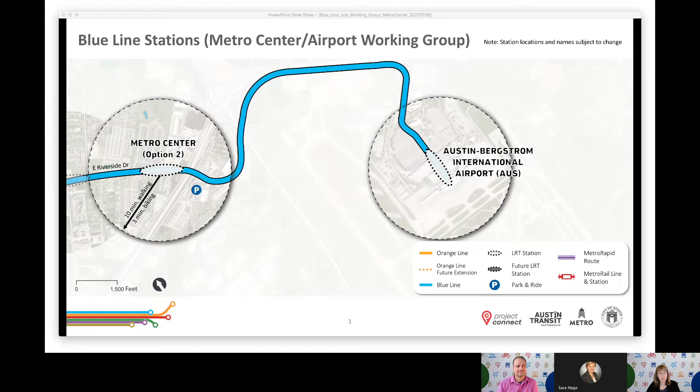In just a moment, Dale is going to walk you through the engineering schematics for the Metro Center Airport section. Schematics are a technical tool used by the engineering team to develop and communicate the design. Dale will zoom into the schematics to provide a detailed look at the transitway alignment and station locations. There is a legend on each page of the schematics, but you won't be able to see the legend while we're zoomed in, so we wanted to briefly orient you. I'll review some important items.

Starting at the top left, in the light green color, indicates an at-grade or street-level guideway. The hatched rectangles are station platforms. The light blue indicates retained cut and fill for the guideway. This color is used to show that the guideway is not at street level, but also not fully elevated. The peach color indicates that the guideway is aerial or elevated above the street level.

The purple shading indicates an underground guideway. We won't see that in this section. Green shading indicates a bike path, while pink indicates a zone for trees and furniture. Gray indicates the paved roadway for vehicle lanes, and yellow indicates sidewalk or shared use paths.

The middle column has a number of different line types indicating different features. For example, the solid red line with notches indicates a retaining wall. The light blue dashed line indicates the proposed light rail transit corridor, and the black dashed line indicates the existing right-of-way limit. Referring to the existing right-of-way is helpful where there might be a need to acquire additional space for transportation facilities or right-of-way through the corridor.

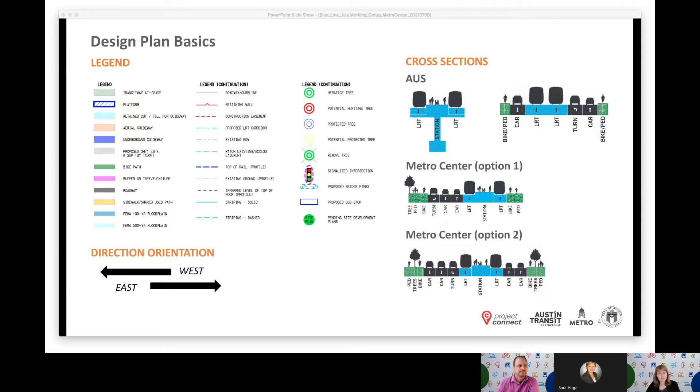Bicycle and pedestrian facilities, as well as tree and furniture zones, are indicated in green. Car and bus lanes are indicated in gray. The light rail lines and stations are indicated in blue. With that, I'll turn it over to Dale to share the engineering design plans.

Great, thank you so much, Diane. Again, I'm Dale. I'm part of the engineering team that's been developing and evaluating the various options we've been considering for the alignment and things like station locations and overall setup for the transitway between Metro Center Station and the airport station.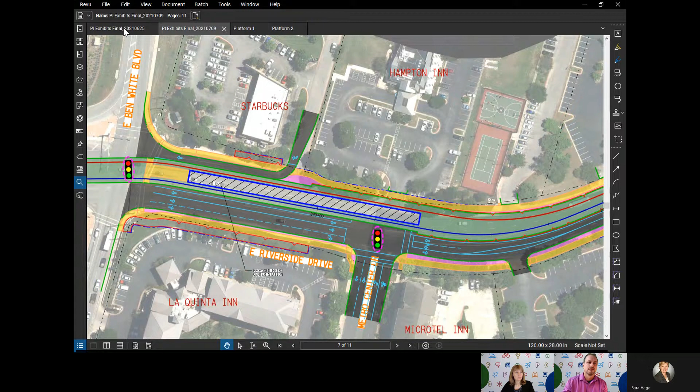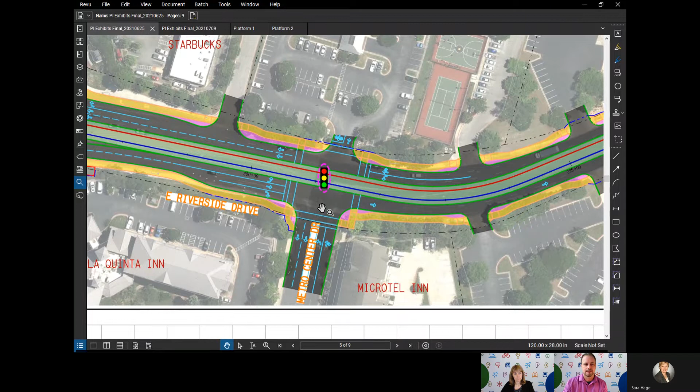Let's flip back over to the option where there's not a station shown in this area, and continue east. In this version, Metro Center would just be a signalized intersection with turning movements allowed from both ways, with through lanes on both sides of the central running transitway.

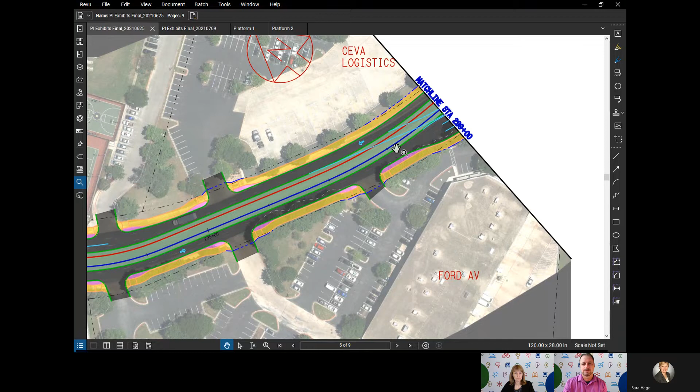Heading further east along Riverside Drive, this version transitions the transitway onto the north side of Riverside at Hoke Lane. You can see where we go from center running on the left, and as we traverse Hoke Lane, we end up on the north side, with all the lanes pushed down onto the south side of the transitway.

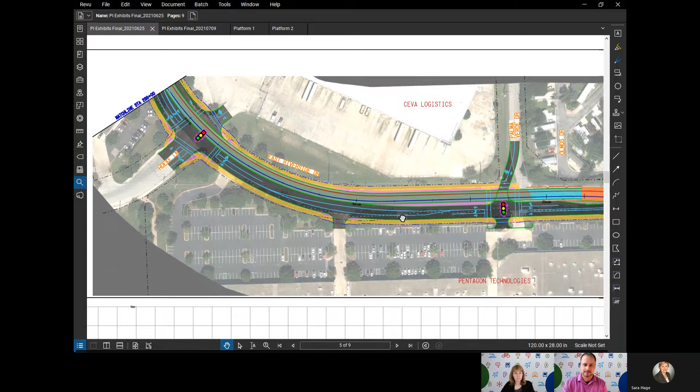Hoke Lane would be a signalized intersection. This is all still being evaluated—we're looking at different options for maintaining the center running here as well. So this is just one version of what that might look like.

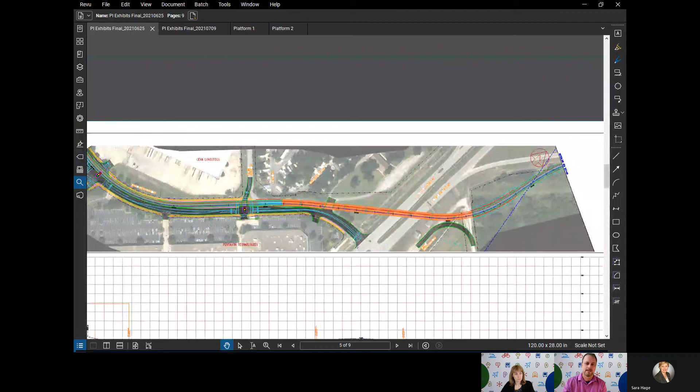As we get over to Palma Verde Drive, let me zoom out a bit so we can get our bearings. Riverside Drive comes through here and more or less dead ends into 183. This is south of 71, which is right up here, so this intersection is just south of 71. This is airport property, and off the screen to the bottom is the end of the west runway, with 71 running left to right up around the top.

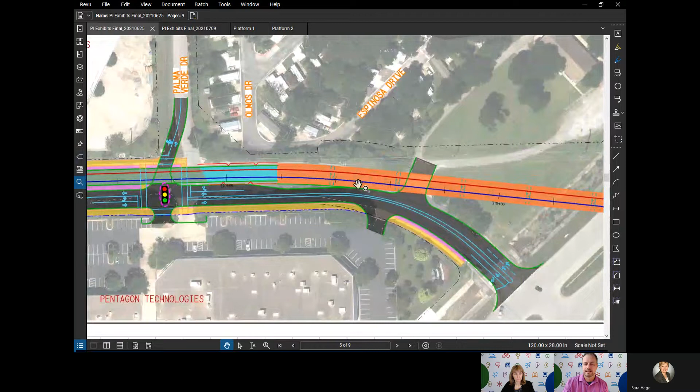As we come down Riverside, we need to get up and over the 183 freeway. The green shading indicates we're at grade at existing ground, and the orange areas mean we're elevated onto a bridge structure. That's the difference between green and orange—green being at grade, orange being elevated on a bridge. You can see what the columns and beams over that bridge might look like, shown by these green dashed lines.

To have enough space to get high enough and maintain access to this property, with the bridge high enough here, we have to relocate the Palma Verde intersection a bit back towards the west. So you see the driveway and the Palma Verde side moved over here to allow us to still be at grade as we cross that.

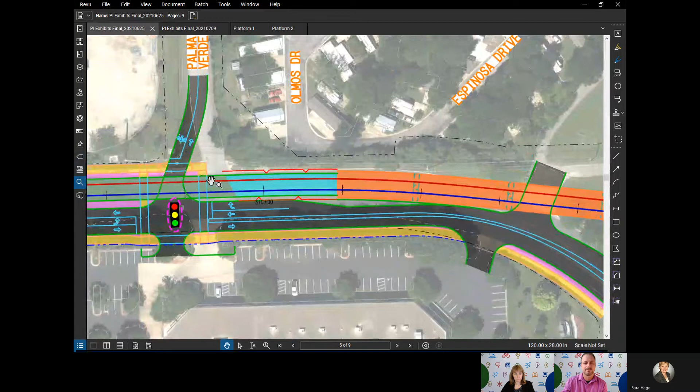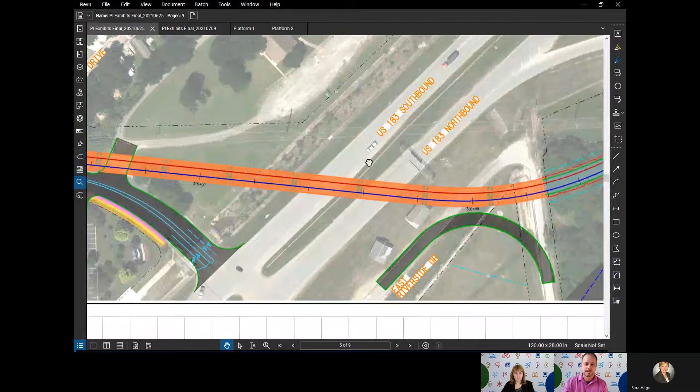We're trying to get up high enough to ensure access to this property, and also high enough to allow for truck traffic and future TxDOT plans as we cross 183. We're coordinating with TxDOT on future 183 plans, which are very preliminary at this point, but we're trying to plan ahead with them.

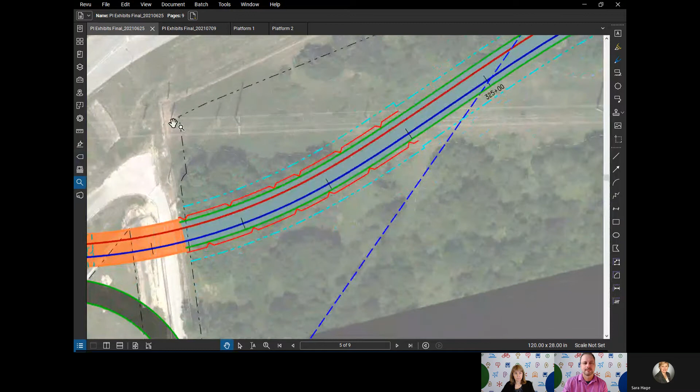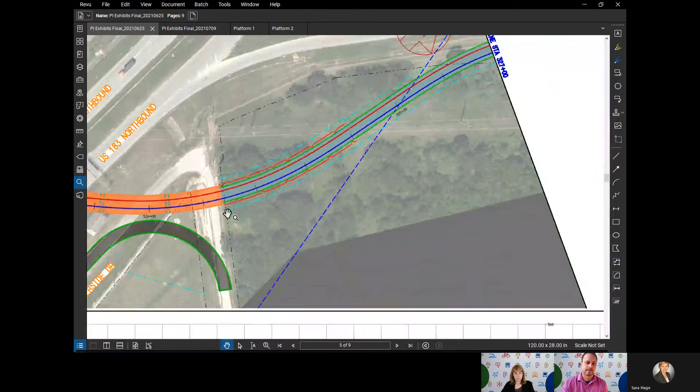Then we get over to the east side of 183, and we're trying to get back down to grade as we cross underneath. You can see in the aerial there are very large Austin Energy transmission lines running through here, and they're very tall. Being off the end of the runway, we need to be down low so we can't go over them, so we're trying to get back down to grade and underneath these Austin Energy lines.

In addition, this blue dashed line indicates protected areas off the end of the runway, where we do not want any structures or retaining walls within that blue runway protection zone. So we're also making sure we get back down in time for that.

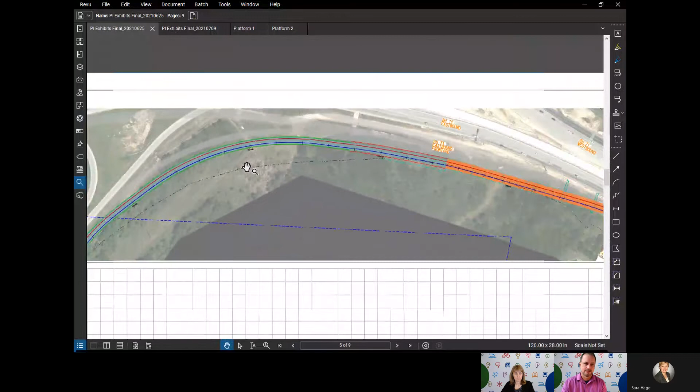Same area—183 is just off to the left. This road is the existing connection between 183 northbound and 71 eastbound. The light hatched gray area shows planned roadways that TxDOT is currently designing—a new frontage road running parallel to the existing main lanes of 71, creating a dedicated exit road for the airport. We've been coordinating closely with them, incorporating their plans with ours, which is largely dictating our alignment. We're following closely along with their proposed alignment as we swing around here.

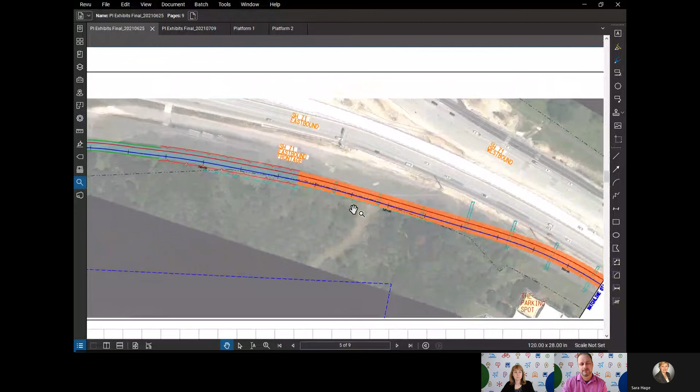As we come around here, we're getting parallel with 71, and we run into a constraint where there are large overhead poles, a parking spot property, and the proposed TxDOT frontage lane. We basically run out of space for our transitway to be in its own area, so we end up decking the transitway on top of the new proposed frontage road for TxDOT.

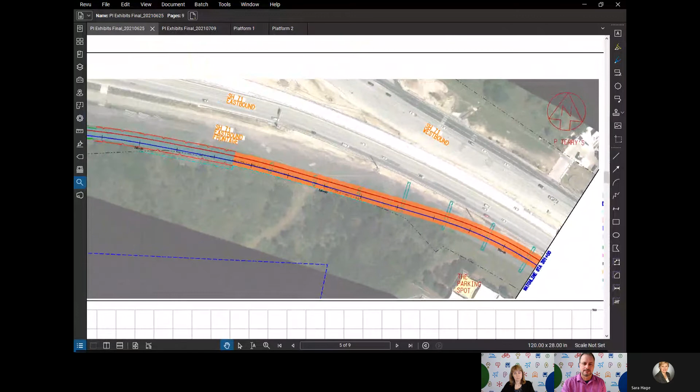So that allows us to just be directly on top of that future road, and you can kind of see how the bridge structure straddles across that future road as we get through here. So again, we have transitioned from being at grade back to elevated, so we're elevated and stacked on top of that road. And then get us back to the next page here.

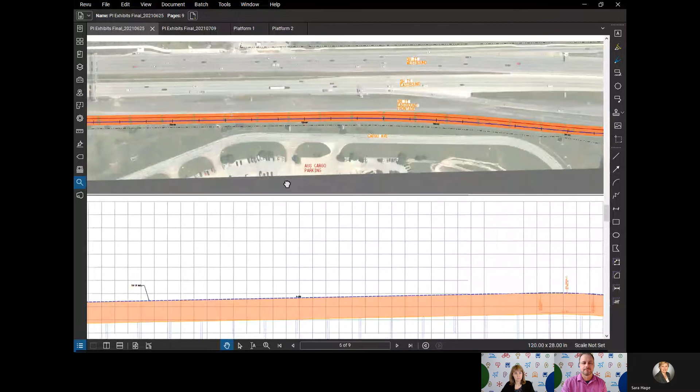Yeah, and so here's the parking spot as we continue through here. So we're decked on top of the future TxDOT frontage road. And then we get past the parking spot, past this Austin Energy substation, and then we swing out. So we aren't on top of the future road any longer. We're running parallel and right next to it, still within TxDOT right-of-way. This is the parking lot for the cargo facility at the airport.

So we continue to head to the east here. So here is Spirit of Texas Drive, which is the cargo exit. When you see that exit on the signs on 71, that's what Spirit of Texas is. We'll be elevated and we will cross over Spirit of Texas Drive, and then we hang a right and head basically directly south in towards the terminal.

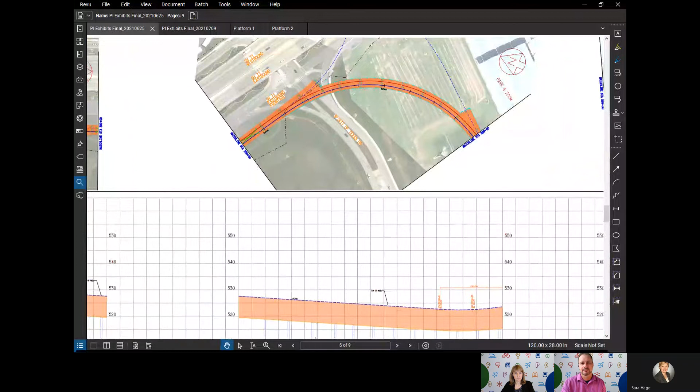We go ahead and remain elevated all through here to help avoid any conflicts with current and future airport plans and their expansion of their different facilities, and make sure we don't impact their roadway interconnectivity through here. So we stay elevated as we come through here. We cross over Hotel Drive.

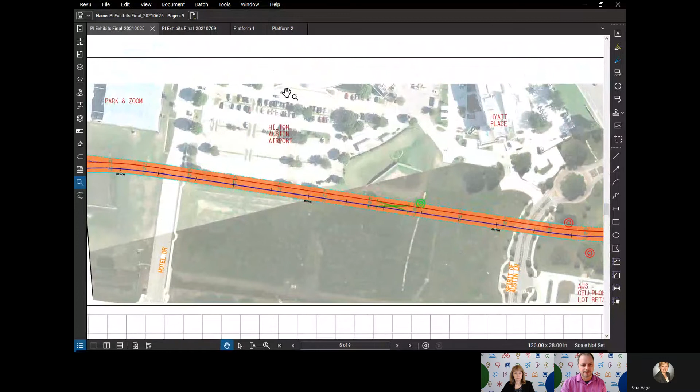Just off the screen here is the Hilton Airport Hotel, which is that large circle building, which was here in the Air Force days and has been converted to the airport. There's a newer Hyatt hotel in there. The cell phone lot is just down here where you park and wait for folks to call you when they're ready to get picked up.

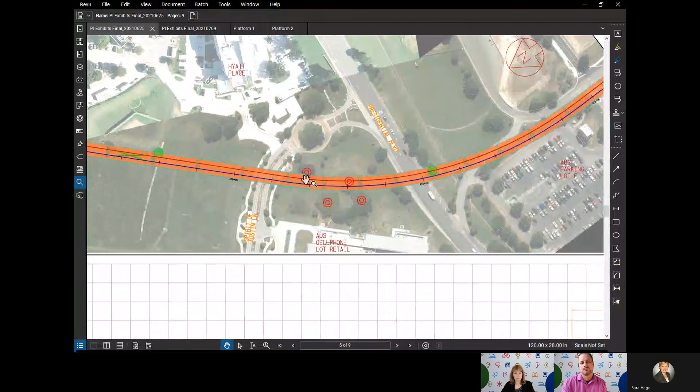So we cross over the top of Spirit of Austin Lane through here, and also over Presidential Boulevard. Presidential Boulevard is the main entrance road into the terminal that you would take. So we stay elevated and cross over those roads and then get into the main parking areas on the airport property.

As we get in close to the terminal, we traverse our way through the airport parking. We are still elevated, minimizing our impacts to the parking, maintaining as many parking spaces as we can through there, not impacting the connectivity of all that parking in these parking lots as well. And we come up to a possible location of our station, which is located in between their two parking garages.

This one on top here is the rental car parking garage. The one below is the blue parking garage that has recently, in the last couple of years, been constructed. To the right, this roof you can see here is the short-term parking garage right in front of the terminal building there. So this shows us kind of squeezing in between all these parking garages and getting us as close into the terminal as we can.

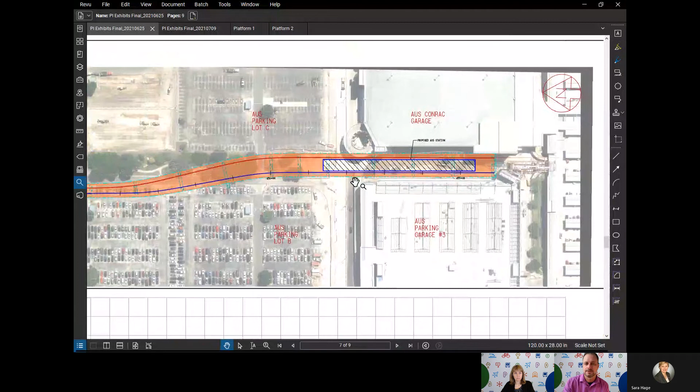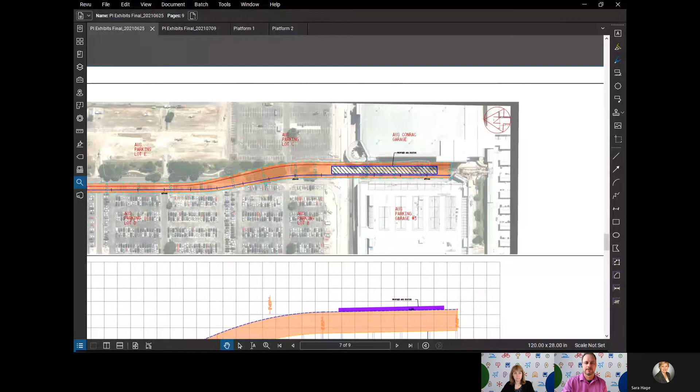As I said, we're going to be elevated through here, and a big piece of that is our coordination with the airport. They have a lot of plans for expansion for their terminal that's just starting, and so we want our station and their plans to line up as seamlessly as possible so that pedestrian access is smooth and easy. So the elevation of this station is going to be coordinated very closely with the airport and where their pedestrian access into their future expansion is going to take place.

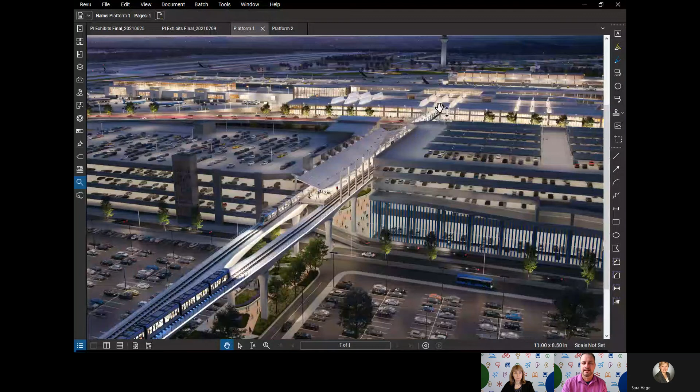You can see the tower here in the background there. Here's a different view, not ground level, at the station level. Looking at the tower here in the background. So this is what the station could look like if it was located in between these two parking garages in there. I think that's it, Diane. I think I got us all the way to the end.

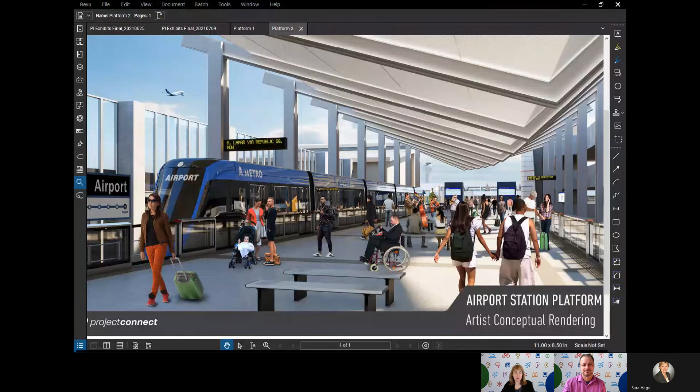Thanks so much, Dale. And thanks again, everyone, for joining us to review the Metro Center Airport section of the Blue Line Light Rail project. Please take a moment to complete the questions below and tell us what you think about the project's design in this area, including strengths, weaknesses, and opportunities.